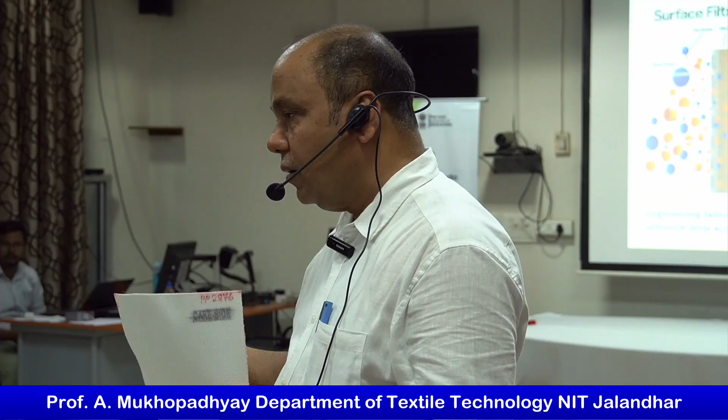Liquid can be reused in the process. As for the media, it is not for one time use - it can be used repeatedly because it is a continuous process. Again, if you are going for RO filtration, it is a continuous process, but from time to time you will have to go for backwash.

That is necessary for membrane filtration - in all membrane filtration, from time to time regeneration is required, because membrane is very costly, so you cannot throw it out. So time to time you will have to go for regeneration.

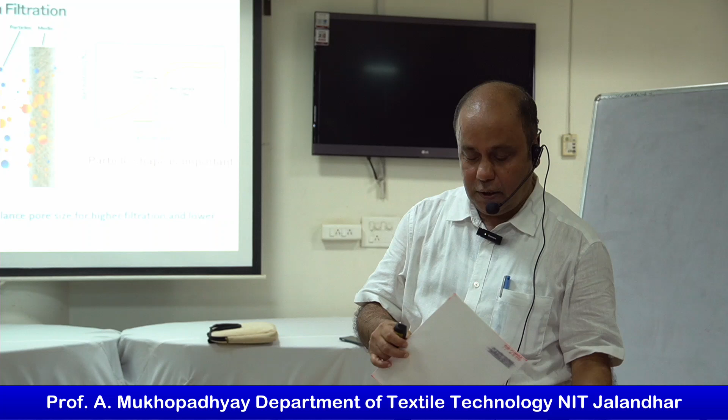If you talk about surface filtration versus depth filtration - whenever I talk about this kind of filter, at a certain depth the particle will be arrested, so this is known as depth filtration. Surface filtration means it should be on the surface. Why are you not going to the depth? Because depth filtration will lead to higher pressure differential.

Because this side is more smooth, it can dispose of the cake better - that is why it is engineered. This material is engineered in a particular way, as I have shown you - this side will be rough, but this side is very smooth.

This can be done by means of weaving - I will tell you in due course of time. This side has to be smooth so that you can dispose of the cake properly. Suppose if you are going for spun yarn - I don't know how many of you know spun yarn, hairy yarn - spun yarn will be on the back side.

Because of its hairiness, its filtration capability will be more. More you can have the filament on the front side. Because of the filament, it can dispose of the cake in a much better way.

If you see the structure of denim, one candidate is wearing denim, the back side is different, front side is different. How is that possible? It's possible by means of weave structure. We make the weave structure such that this side is smooth, so it can dispose of the cake properly, and the back side is rough. That gives more filtration capability.

Now one of the interesting challenges, there are many challenges. Disposing of the cake is one sort of challenge, but there are many others. Suppose if you make this structure very compact, what will happen?

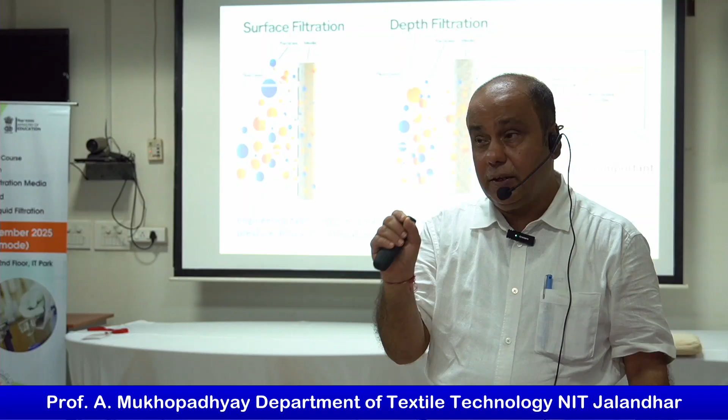It's not that at a particular particle size, if you get efficiency, it's all fine. Not like that, it all depends on the application. Suppose the application demands very fine particulate to be removed, we must see what the efficiency is at that level, and for that the sensor requirement will be different. Different applications need different kinds of setups, it's not possible to do everything in a single setup, because everything should be aligned, sensor should be aligned, everything should be aligned.

Now if you see here, I am showing you surface filter and depth filter. In depth filter, the retention could be 60 to 90% for a particular size. In surface filtration, you can have retention like this. So for a particular size, if the retention is 90% for these particular particles, I think there is some problem. Is it okay? We can get 99% efficiency for that particular size.

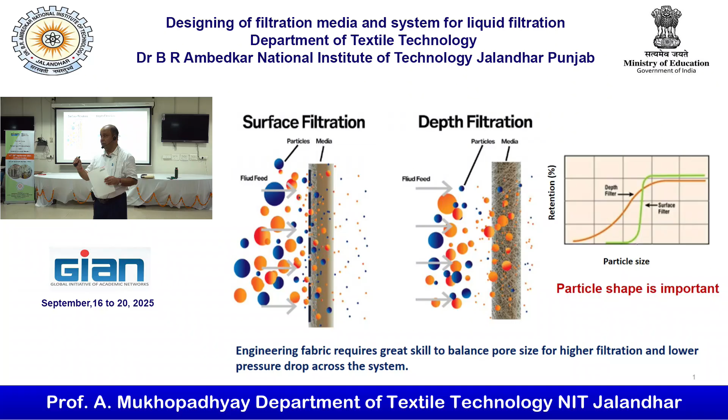That is possible because it is an absolute filter, the pore size is very uniform. Whereas when the pore size is not very uniform, you can have small pores as well as large pores, so you cannot maintain one particular efficiency level for a particular size, that is not possible. But if you are going for a woven fabric, you can maintain a particular high efficiency level, and that could be constant, you can maintain it at a constant level.

Now, if you see, the concept of complete blocking filtration and bridging filtration is important.

Because if you talk about air filtration and cake filtration, mostly you will find this thing is very prominent. I am not talking about ultrafiltration, RO and all this, because there the pore size in the membrane matters, because in the liquid you have few particles. The particle load will be much lower in reverse osmosis and ultrafiltration. As the particle load is very less, the blocking mechanism basically works.

But whenever the particle load is more, quick cake formation will happen and the cake will take part in the filtration process. After the cake is formed, the cake acts as the filter, not the fabric. The fabric's role becomes secondary. It basically initiates the cake formation. Once the cake formation is over, then the cake takes part in filtration. I hope the point is clear.

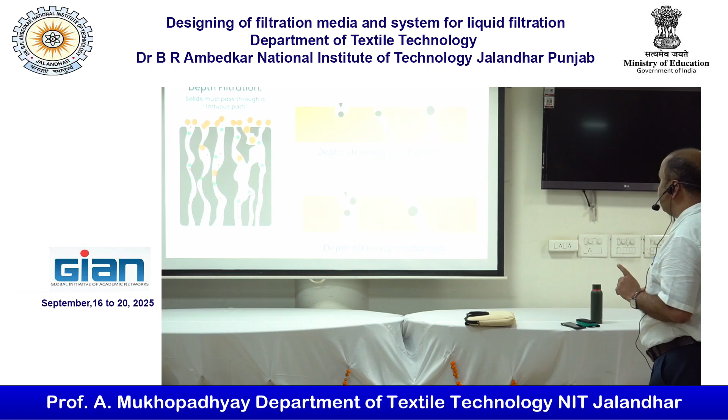Now if you see the depth straining and depth retaining mechanisms, at a certain depth it is retained, but at a certain depth it is straining, because we conceive the pores like this, but actually the pores in nonwovens are interconnected in nature. Researchers used to conceive the pores in a zigzag manner, but actually nonwoven pores are not zigzag; the point is that they are all interconnected. A particle may pass through the top surface, but it can get caught at a certain level.

So depth straining is very common, but depth retention in liquid filtration is uncommon. In air filtration, depth retention is common, for example if you are using a pre-filter. That is why, whether air or liquid, flow velocity is very important. If you have a dominant flow velocity, then retention at a certain depth may not be possible. That is why flow regulation is very important.

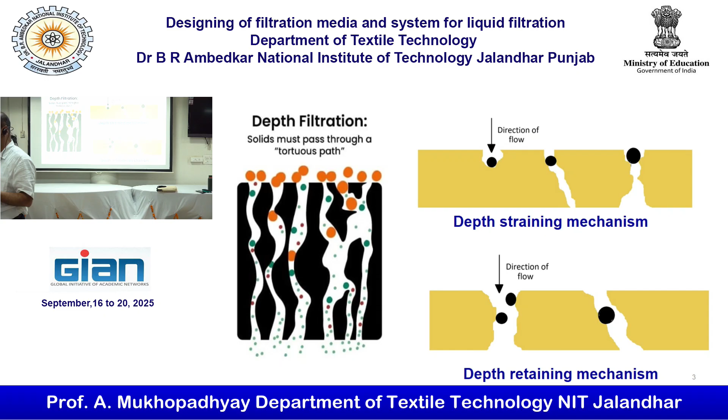Suppose you are designing a filter media or an HVAC filter, why do you go for pleating? What is the reason for pleating? So we can get a larger surface area accommodated in a smaller space. Even in automotive we go for pleating so that we can accommodate a larger surface area. But the basic purpose of pleating is the reduction of velocity. If you can reduce the velocity, that always helps in capturing the particles. That is the basic philosophy, and that is why people go for pleating.

Again, in the oil filter and everywhere, space is one aspect, but it is better to say that by giving more area, the volume flow divided by the area, that is the filtration velocity. Volume flow in meter cube per minute divided by area in meter square gives you the velocity. So velocity should be as small as possible, whichever the application.

If you have nearly zero velocity, that will be perfect. But the problem is that there will be a huge requirement of filter bags, or in this case a larger surface area is required. That's why it is a balance. You have to make a balance: what sizes can you accommodate?

Because if you can reduce the velocity to the zero level, obviously you can have more and more capture, but we cannot go for zero level, because the size of the filter will be huge and that will be difficult to manage.

Now this is the tortuosity factor. Again it is conceptual; whosoever measures the fabric properties can provide you the tortuosity factor, and this is how tortuosity is defined: length of the pore path divided by the thickness of the material. Greater the tortuosity, greater will be the capture of the particles.

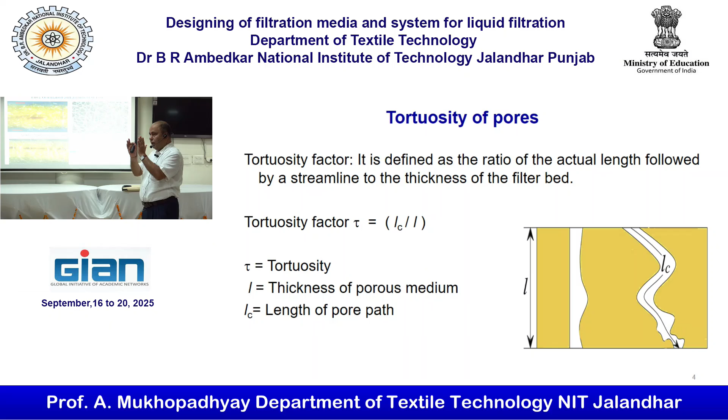Sometimes it is also said that if you are making needle-punched non-woven and going for angular needling, the path of the pores will not be straight. If the path of the pores is not straight, that will be better for filtration application. So different types of structure are there, and in non-woven, one of the problems is that if you have a straight path after the punching process, and I will discuss non-woven fabric manufacturing also, the particle can penetrate through.

Another important aspect is cake filtration. Okay, so the point here is that in majorly air filtration applications, non-woven is preferred, this material is preferred. Whereas in the case of liquid filtration applications, people prefer woven fabrics.

But again, there is a but. People are moving towards development of non-woven, because last class I showed you that very compact non-woven can be used, which can assist surface filtration. So that non-woven can be specially made. What is the advantage of non-woven over woven fabric? Anyone? Cost, obviously non-woven cost will be lower. But what is the basic advantage? Smaller particle capturing as compared to their pore size. The pore size distribution. Any other point?

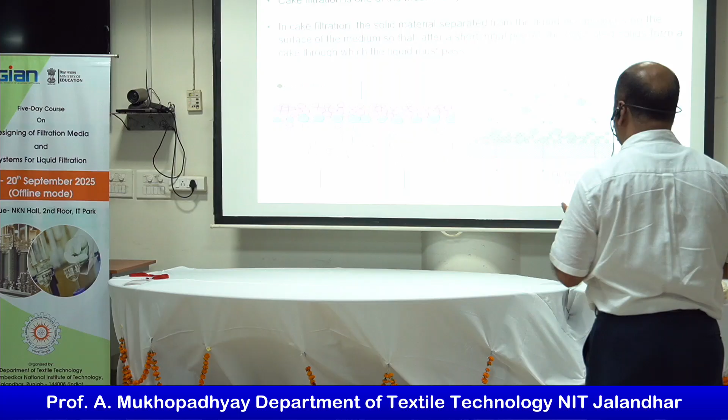Second is the pressure, and third is the life. These three are very important whenever you are selecting the filter. Now in cake filtration, as I told you, once the cake is formed, the role of the cake becomes very important, and the fabric's role becomes secondary.

But in most cases we forget; we assume particles are spherical bodies. That is our assumption, and that is again a problem. The basic problem in most research is that we take the data and never think about what kind of data we are getting. That is the problem.

We can have different kinds of dust particles. They can be flake-like, but the equivalent spherical size will be much lower. They could be needle-like, and the equivalent spherical size will be much lower. If you talk about needle-like particles, capturing will be more with needle-like particles. And whether hydrophobic or hydrophilic particles are present also influences the nature of cake formation.

So it is not just that you see the data from the instrument, that is okay, but you will have to see what kind of particulate matter it is. Is it differently shaped or nearly spherical? Particles are never spherical. So the question arises: why do we take them as spherical? Why not other structures or dimensions?

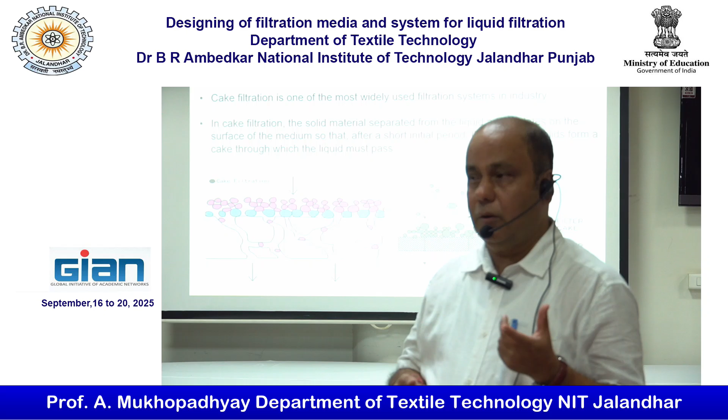Any answer? Why do we take particles as equivalent spherical bodies? What is the basic reason? Why a sphere, why not other shapes? Whichever direction it moves, it will have the same. Calculation-wise, it is easy to calculate.

Because the sphere is the only shape where you can indicate the dimension by diameter. If you take any other shape, you need multiple dimensions to indicate the size and shape of the material. So the sphere is unique in that sense: by indicating the diameter, we can indicate the size of the material. That is why we use a sphere as the equivalent body.

Now in cake filtration, I have written a little about it. Cake compressibility is very important. The ability of the cake to compress under pressure affects the filtration rate and cake properties, because the cake properties change under compression. So is it a compressible cake or not? That also matters a lot.

But we will not be able to control the cake formation, right? It all depends on the type of solid particle you want to arrest, because solid particles could be compressible or non-compressible. So depending on the type of solid particle, compressibility will be there. Filtration rate is again a very important concept.

With time the cake becomes thicker and thicker. Yes, that's why you need to dispose of it. Like yesterday I showed you, in a drum filter it is gathering, then the cake is disposed of on the other side, because suction is effective in a particular zone and not in another. That's why disposal is possible. But if we have a tubular kind of filter, then disposal?

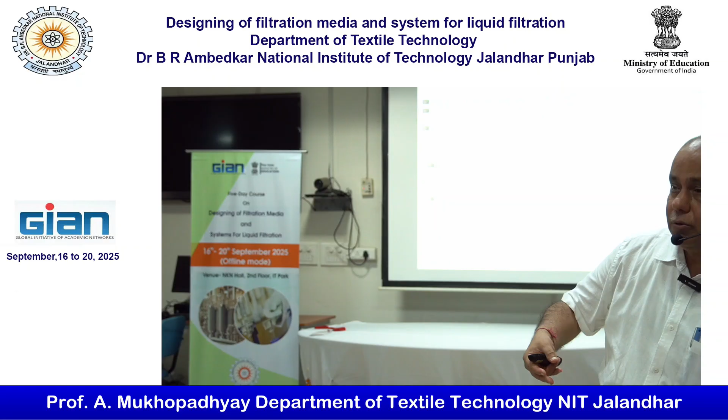is under depth filtration. Depth filtration is workable only when the dust concentration, particle concentration, is very less. We can have a reasonable time period after which you can throw it away. That is as simple as possible. But surface filtration will have to go for a cyclic process to regenerate it. So cake filtration is widely used in various industries: wastewater treatment, food processing, chemical processing, mining.

Now you can see this is the kind of pre-coat material. Very light cellulosic matter, as I just mentioned. Another material that can be used as a filter aid, especially in situations where silica cannot be tolerated. So here if you see, this is the layer, this is the dust cake. I will show you the application. So this is the pre-coat layer, inside it you have the main material.

So initially you must pass the liquid having the cellulosic matter, for example, to make a pre-coat on the fabric surface, so that you can arrest finer particulate matter. I will show you the advantage. Pre-coating protects it from blinding, so life will be more; it assists in the collection of particularly fine particles; and it enables more efficient cake release. So these three things are possible.

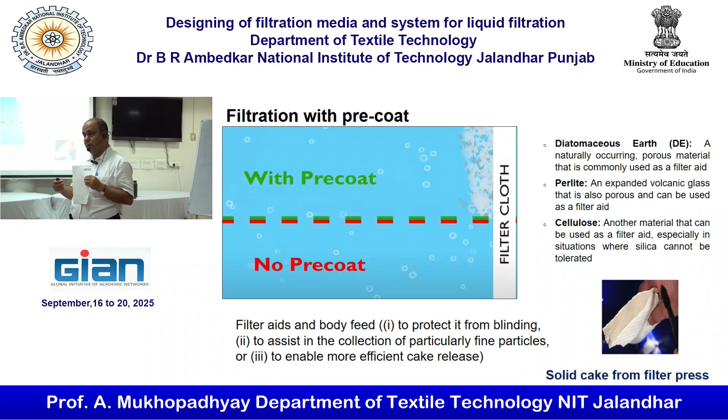Coating means that in the liquid bath you can have cellulosic matter, for example. Initially you expose the fabric to this liquid. Once it is exposed, the fabric layer will have some pre-coat. Then we can run the main material, I mean the liquid and solid, through the assembly. So it will act as a pre-coat. If you see here, outside it is a pre-coat, inside it is a cake. So it can give you a great advantage in certain applications.

Suppose silica cannot be tolerated, so obviously you need the efficiency at a much higher level, so you can go for pre-coat. This pre-coat has to be porous in nature. Yes, obviously it has to pass through the pre-coat, but the pre-coat can give you more filtration capability. And it can also be disposed of in a much better way, because a normal filter cake may not be disposed of as easily, but the pre-coat can be.

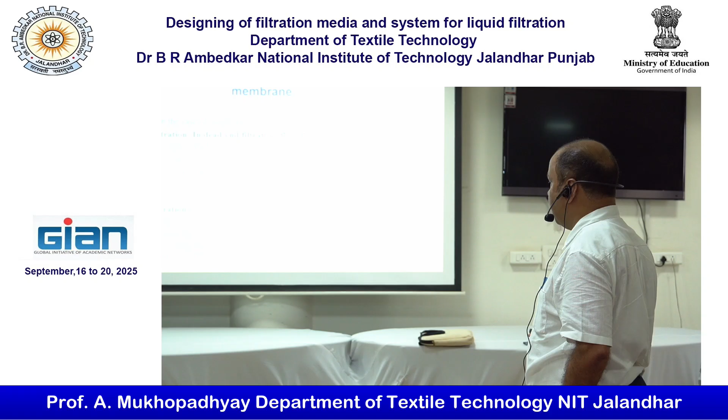Now another classification is dead end filtration and cross flow filtration. In dead end filtration, as I told you, the flow will be perpendicular to the plane of the fabric. In cross flow, like ultrafiltration and RO, you will find it flows in the plane of the fabric. Ceramic, metal, polymeric, all types of membrane are possible. Manufacturing of membranes is also a great task. How to improve the membrane?

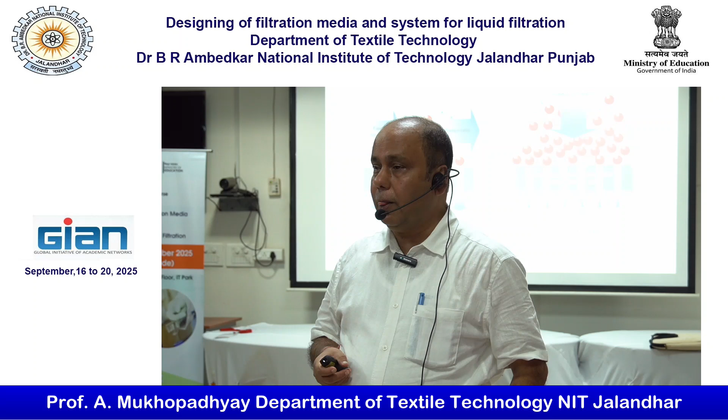Suppose you make the membrane thick, then the pressure differential will be more. How to make a membrane fine and with longer life? That is a challenge for various applications, not only this one. For example, at high altitude, if you want to use the membrane on the inner side of the fabric as a breathable layer, it is important to make the membrane very fine and at the same time strong. Why should it be very fine? So that the pressure differential is less. That is one of the tasks for the membrane manufacturer.

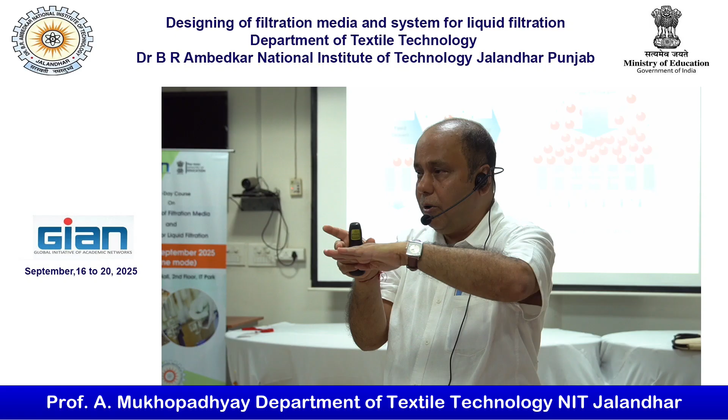I have seen at an international conference, people kept a membrane with a water body above it, and from the bottom they flowed air. So in the liquid you can see air bubbles moving up. The membrane stops the water from falling, the bubbles move up but water does not move down, because the pore size of the membrane could be 0.0001. It could be so small. The pores should be so small that they allow vapor but not water.

Okay, so membrane manufacturer, again that depends on the place; from place to place the membrane will be different. Now if you see here, the flow direction will be parallel, so here proper cake formation will never take place because it will be shearing out all the time. But then how it is getting managed, that also I will tell you.

And dead end filtration is most common. This is the dead end filtration, where it is perpendicular to the plane, and here it is parallel to the plane. Now you can see the dead end filtration, blocking filtration. This is for testing, water testing and biotherapy manufacturing. So basically the contaminant level, as I said, is very low. So we are going for blocking filtration in the case of dead end filtration. Contaminant levels are very low.

Now this is interesting to see. Okay, now the working principle of the tangential flow filtration. If you see, this is the cylindrical body we have talked about, and these are the particles which are moving through the cylindrical body inside. There could be also outside to inside filtration. Here I am showing you the inside to outside filtration. So these particles are moving through the cylindrical body.

retentate flow. Retentate flow means which is having some residual, which is having the solid particles. This again will be circulated in the process. So it is not a single setup; there could be multiple setups. Once the retentate is passing through, it will move into another unit, then gradually the water will get filtered out, and you are getting the solid content in the retentate.

So if you see, here is a particle, restriction is there, restriction must be imposed. Permeate flow, this is the permeate. So suppose here it is passing through the membrane from the top and from the bottom, although it is cylindrical, so from all over you will get the permeate flow. And this is the retentate flow. Retentate flow means which is having the particles in it. Obviously the quantity of water will get reduced. Getting my point?

RO, yes, RO, ultrafiltration, in all cases. For RO, the setup is different. I will show you the setup for RO. So in this case, when it goes to the second filter after this, the retentate flow, there the concentration level of the particles will be higher. So there the porous membrane parameters are different, or is it similar? It is similar. If it is ultrafiltration, similar membranes are being used in all modules. But gradually it will be denser and denser, and challenges will be more.

Now if you see, there are two philosophies. One is inside feed. Here if you see, this is the hollow fiber. In the hollow fiber you are having the semi-permeable membrane. So basically it is flowing inside, and the picture I have shown you works on the same philosophy. And in the other case, the feed will be from the outer side.

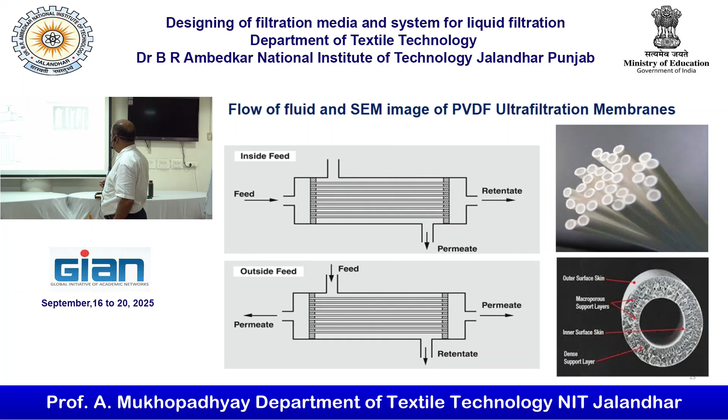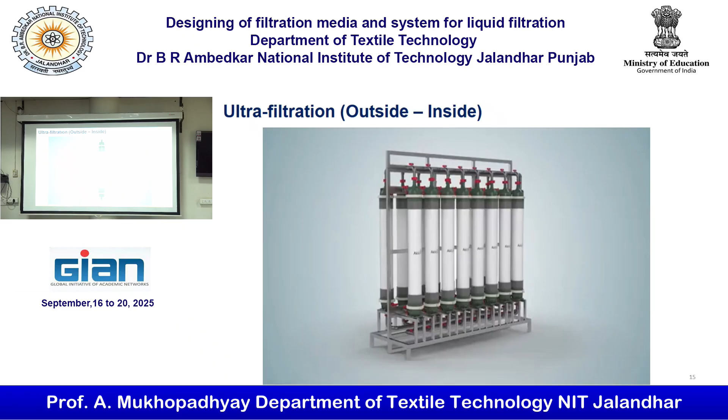Components include lower and upper cap, clamp, housing, raw water distribution channel and separator, pipe, and hollow fiber. The raw water distribution channel and separators are situated in the middle of the filter. This specially designed inner distribution mechanism ensures that water is equally distributed in the module.

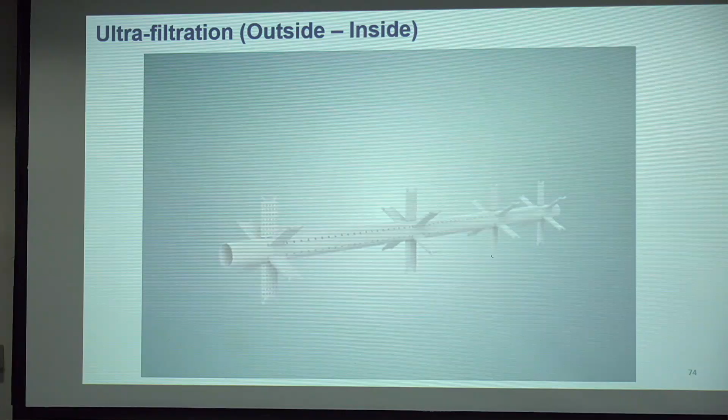The modified PVDF ensures a high chemical and mechanical resistance to the hollow fiber. The hollow fiber has smaller pores on its outer surface, creating the active filtration surface. This design gives the membrane a high capacity of contaminant retention. The hollow fiber is both highly permeable and easy to clean. Modified PVDF has a higher mechanical and chemical resistance compared to other materials.

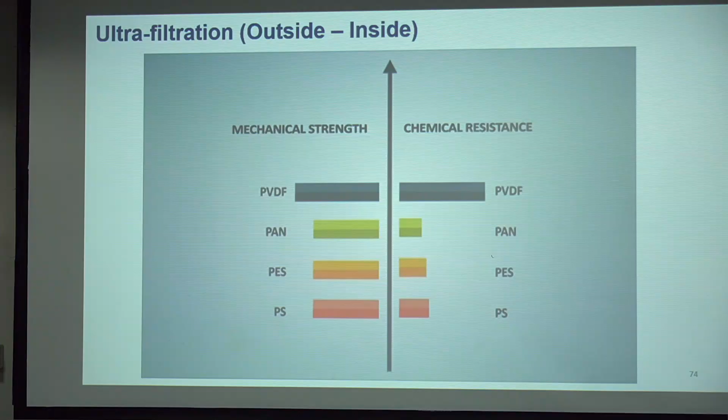The nanoscale pores located on the outer surface of the hollow fibers allow the water to pass through the thickness and retain viruses, bacteria, and solids larger than 30 nanometers. These substances cannot enter the fiber, they stay outside. The pore diameter of our hollow fiber is smaller than 0.03 microns.

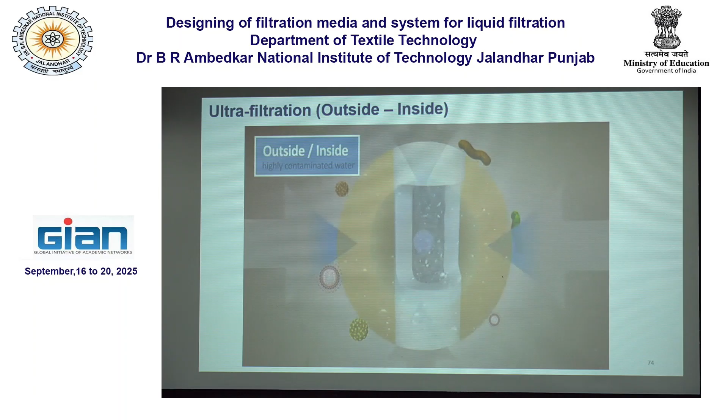The filtration process takes place from the outside towards the inside of the hollow fiber, so the membrane can be used for highly contaminated water, has a larger surface area, and can be cleaned more easily.

During the filtration stage, raw water enters into the module. Raw water stays out of the fibers. Filtered water flows along the lumen of the hollow fiber and goes to the module outlet. The polyurethane-based potting holds the fibers and provides the tightness to the module. The clean and raw water never mix through the module.

When the filter is blocked, contaminants accumulating on the outer surface of the fiber are removed from the filter. This is the retentate. During backwashing, the filtered clean water enters through the clean water inlet. As clean water comes out of the fibers, contaminants which have accumulated on the fiber surface are pushed and removed. Concentrated sludge is discharged through the outlet.

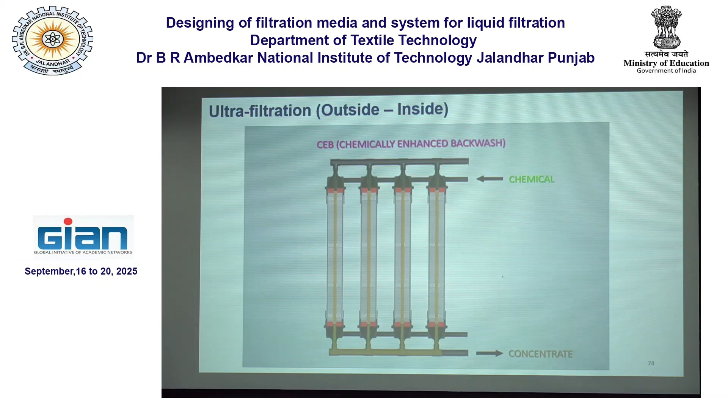Backwashing is performed more quickly and effectively when combined with air scouring. When the removal of contaminants is not sufficient with backwashing and air scouring, chemically enhanced backwash and clean-in-place are applied. Our PVDF hollow fibers are extremely resistant to chemicals, so if it is not possible by water, we can use chemical or biological filtration. Backwash is also possible using enzymes. So there are several ways to clean the filter media.

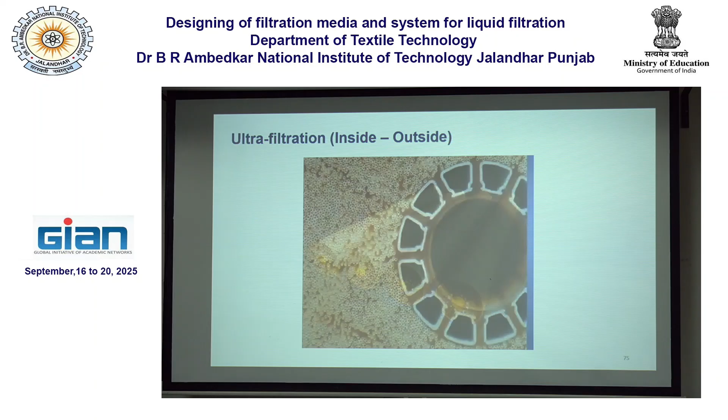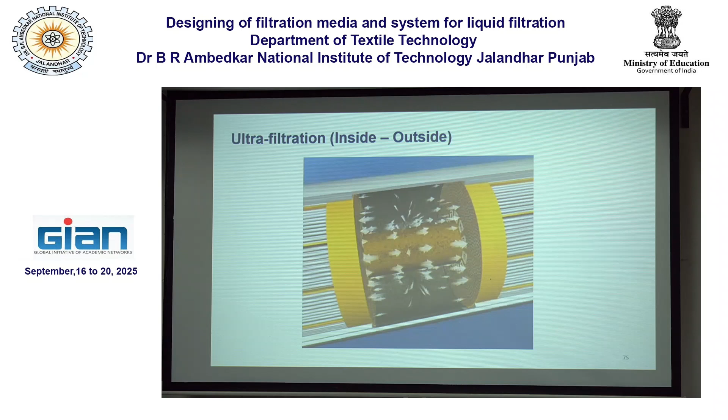This is another example of inside-to-outside filtration. So it is passing through the center of the hollow fiber, and centrally you have the tube through which you are getting the permeate. Permeate means the clean water.

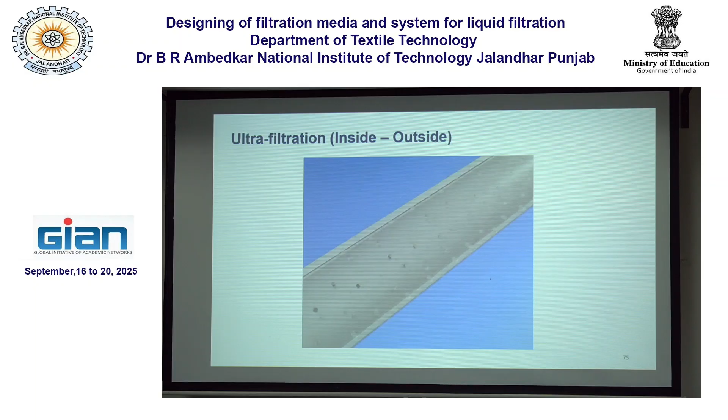You are getting the permeate. This is the hollow fiber through which the contaminated water is flowing, and then we can go. This is another backwashing technique.

So for backwashing, the flow must be reversed.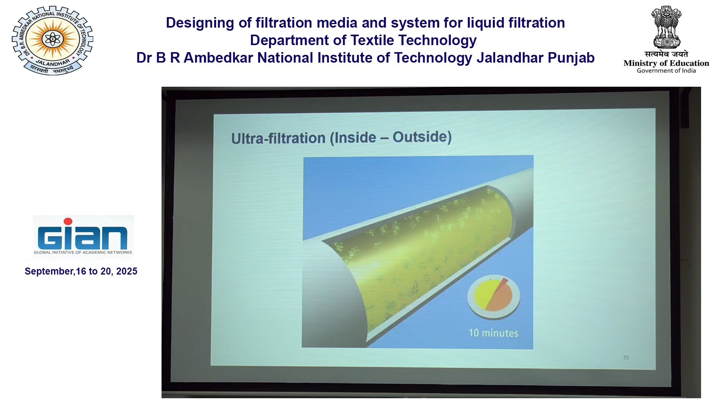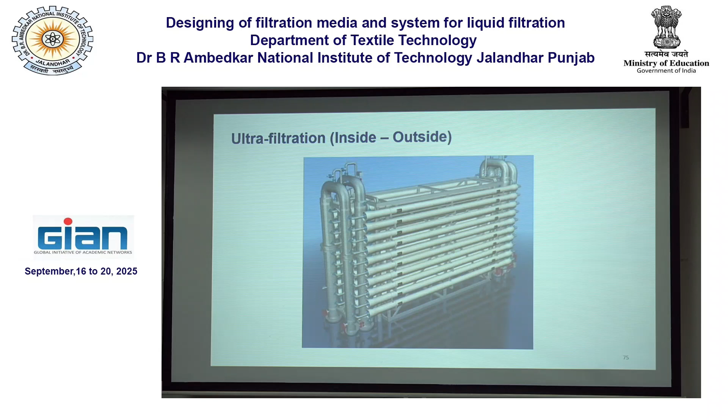Using chemicals. Yes, you can use water. If it is not possible through water, then chemical, but depending on the chemical, it has to be selected. Again, after applying chemical, you will have to use water also at the final stage.

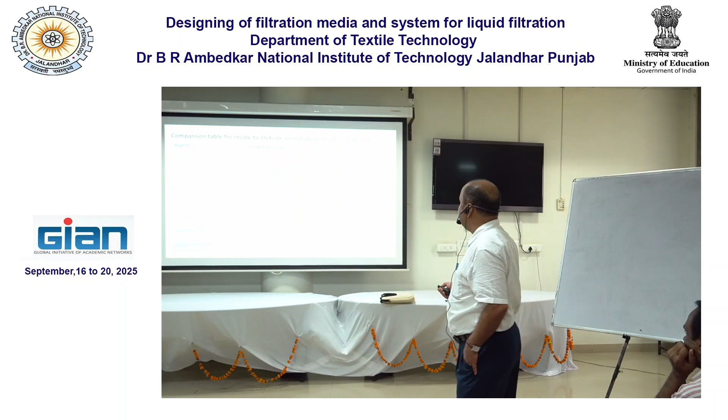Now here if you see, inside to outside is best for low turbidity. Outside to inside is best for high turbidity. I am not showing all of these because these slides will be with you, so you will get some idea. Risk of fiber breakage will be higher or lower in this case—that is the good point. So in certain cases the inside-to-outside is better, and in certain cases for high turbidity, the outside-to-inside filtration will be better.

So if you see normal cases, the mechanism based on flow direction means the thickness of the deposit increases while specific output to the filtrate will decrease with time, because gradually the cake is building up, so filtrate will be less with time. But in the case of cross flow filtration, output to filtrate will remain the same after a certain point of time, and thickness of deposit will remain the same too, because the cake will never build up like that. So after a certain period, thickness and specific output or filtrate will remain the same.

Now if you see depth and membrane filtration, complete blocking is possible, because blocking is the main concern in membranes. Standard blocking is possible, cake filtration is there, intermediate blocking is there. So blocking obviously reduces the life of the media and can affect the function of the media.

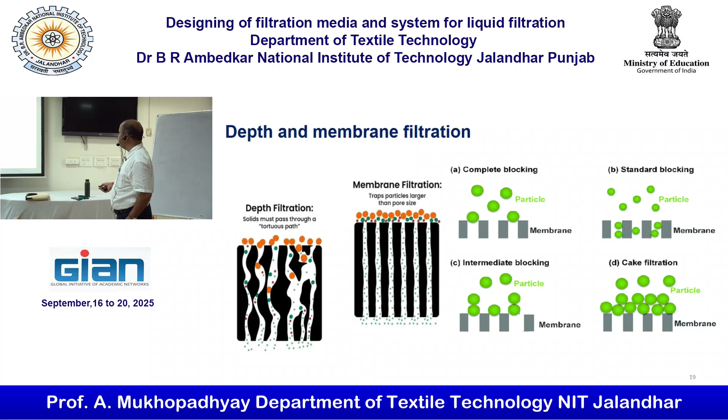As I said, biological cleaning is possible as a cleaning strategy, along with backwashing. Physical cleaning is possible, and people mostly go for physical cleaning. If it is not possible by physical cleaning, then they go for chemical cleaning. It is not that you always go for chemical cleaning - biological cleaning is also coming up, and you can use some enzymes for cleaning the membrane.

So different membranes have different pore sizes. If you see, microfiltration is 10 to 0.1 micron, ultrafiltration is 0.1 to 0.01 micron, nanofiltration is 0.01 to 0.001, and RO is further less.

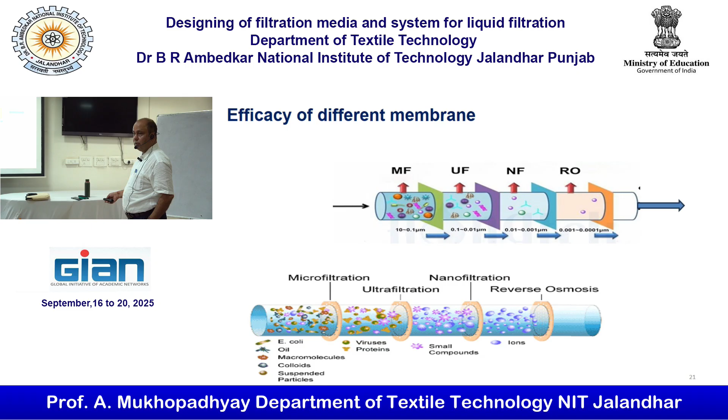So at different stages we remove different kinds of material. For example, ions can be removed in reverse osmosis. Small compounds can be removed in nanofiltration. Ultrafiltration can remove viruses and proteins. Microfiltration can remove E. coli, oil, macromolecules, colloids, and suspended particles. So different filters have different capabilities.

Now going to reverse osmosis, let us understand the mechanism of reverse osmosis also. This is the cutoff of different liquid filtration techniques. So depending on the cutoff, we will have to select which kind of membrane filter is applicable.

Because this is the membrane filter, and the RO filter obviously needs a very high level of force. If you see the membrane filter, ultrafiltration is 0.5 to 10 bar, here 7 to 75 - energy requirement will be much higher. So unless and until you require RO, we should not go for RO because the energy consumption will be much higher.

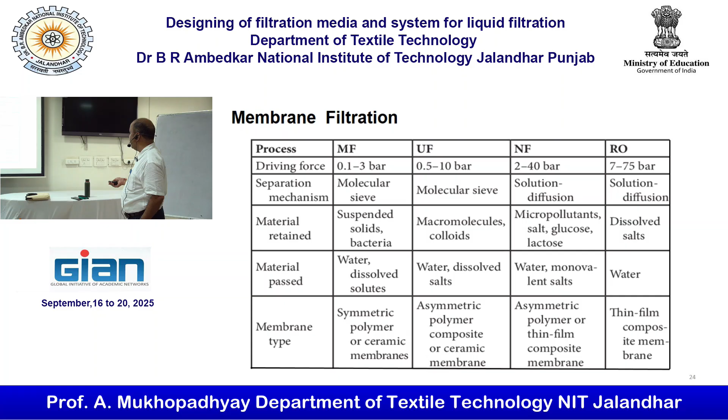That I have already discussed. You can see this slide showing the advantages of microfiltration, ultrafiltration, nanofiltration, and reverse osmosis. Basically you are removing everything - even monovalent ions and multivalent ions are also being removed in reverse osmosis. That's why it is suggested that reverse osmosis water is not also good for health, because we are removing everything.

So these are the different types of membranes. You can have hydrophobic membranes, electrostatic interaction, adsorption. Different membrane manufacturers are also coming up with different types of membranes - biologically inspired membranes are being developed. Sometimes it could be electrostatic interaction, sometimes it can give you adsorption or hydrophobicity. Earlier, membranes were only about size exclusion, but nowadays new membranes are also coming up through research that can give you some additional performance.

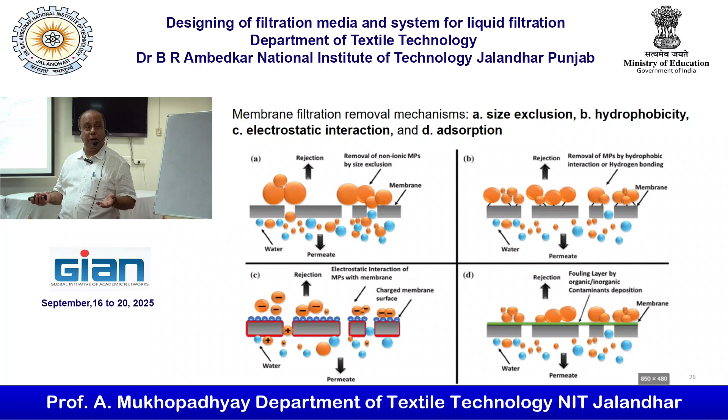This applies to all salts and inorganic molecules, as well as organic molecules. It is therefore a highly effective process for removing a variety of contaminants. Compared to traditional filtration technologies that rely on a screen or filter to remove particles, reverse osmosis is a pressure-driven separation process that employs a semi-permeable membrane and the principles of cross-flow filtration.

FilmTec RO membranes are composed of a thin film composite membrane consisting of 3 layers: a polyester support layer. You see, it is not a singular component - there's a polysulfone substrate and an ultra thin membrane layer, coated by a proprietary fouling resistance layer.

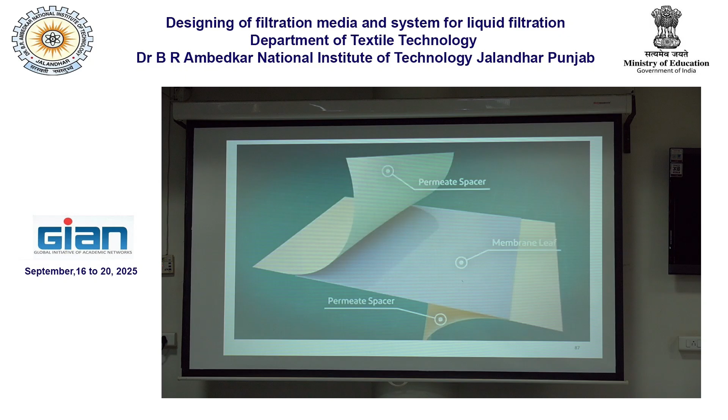This is the feed pressure through which the water can flow. This thin film composite RO membrane is packed in a spiral wound configuration that follows the principles of cross-flow filtration, where the flow is applied tangentially across the membrane surface. As the feed flows across the membrane surface, filtrate passes through - so it is basically moving in a spiral direction and moving to the center.

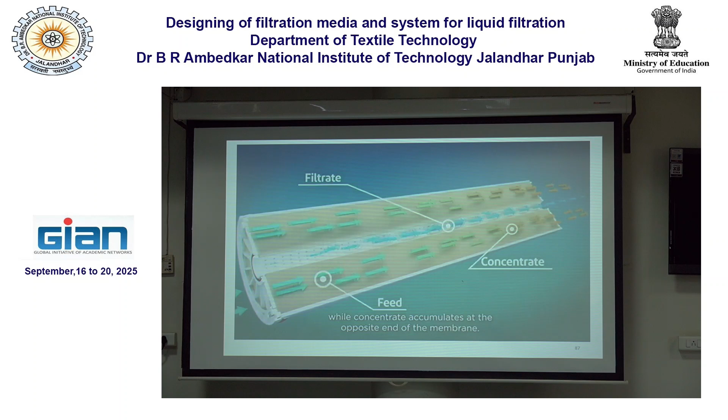FilmTec membranes offer a special interlocking capability called iLEC, which is an interlocking end cap technology offered to selected FilmTec products. You see, one module is attached to another module.

Okay, so up till this, the thing is okay.

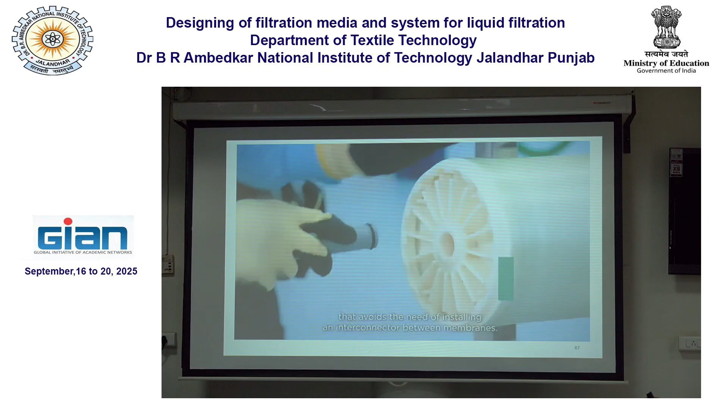Got the idea? So in this case, basically the contaminated water moves spirally, and gradually it moves inward because it is made in such a fashion. So gradually the contaminated water will move inside, and inside you are having the perforated tube through which you will get the permeate. And contaminated water will pass through the spacer, because in between that membrane you are having the spacer.

Spacer - if you see, you can get several videos on YouTube on how the spacer operates. But again you give certain restriction so that the water has to pass through the membrane, because that is the basic philosophy. You will have to put certain restriction, certain resistance, so that water has to pass through the membrane. That is the basic idea. That's why the pressure differential is so high in RO.

Now coming to the centrifuge system, there are two kinds of centrifuge system. One is the perforated basket centrifuge, and this is commonly used. I will directly go to the pusher centrifuge because of time, I'll try to cover it in 5 minutes.

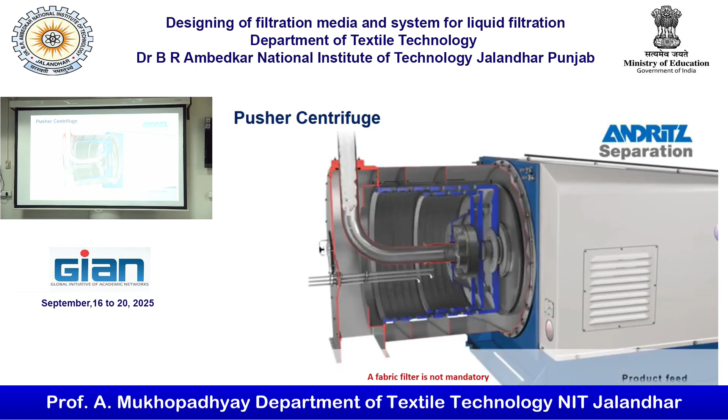Pusher centrifuge, I will show the video, because inside the pusher centrifuge there will be a metallic body, perforated metallic body, over which you can have the textile fabric. This can be used in the case of pharmaceuticals and expensive minerals recovery. So there we can use the pusher centrifuge, because it will be relatively much more expensive. It is short, but maintenance cost will also be important.

You can see how it operates. Cake is formed, but cake will be pushed time to time. Cake is formed and there is a pusher which is pushing the cake in a particular manner. You see, once it is coming to the edge, it is taken out. Cake will be taken out. So it will be pushed. Once the cake is formed, it is pushed. Again formed, it is pushed. So it is gradually pushing the cake, so that at the end, whenever it is coming to the edge, it will be taken out. You can see at the edge it is taken out.

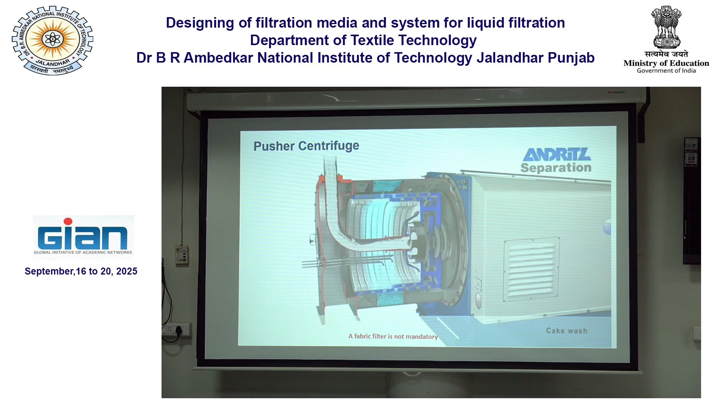So abrasion is very important, because sometimes we neglect it, we always think that efficiency is important. Abrasion also damages the fabric. So here you can have abrasion of the material with the particulate matter or with the solid matter. So abrasion is very important.

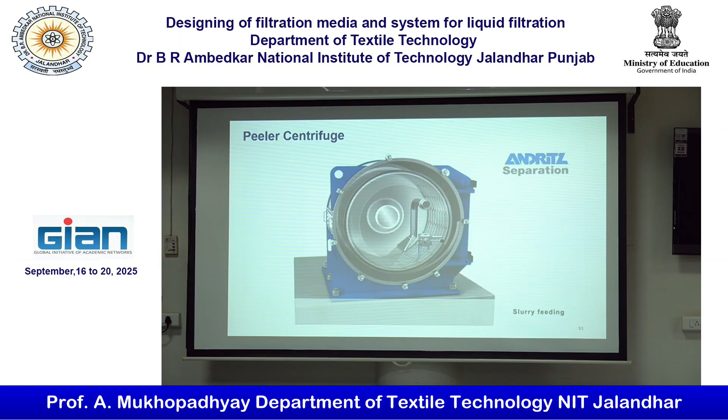Another is the peeler centrifuge. I will show you the direct video, then things will be clear. So it is basically slurry feeding. Initially it will be slurry feeding.

So slurry is fed, and by means of centrifugal force you are extracting the water from the slurry. Here cake is washed - filter cake washing. So, dry spinning.

Cake peeling and discharge. Although I am showing one system after another, the whole system is embedded. So here you are basically peeling out the cake. Cake peeling is there, and through the discharge mechanism you are removing the cake. So cake is peeled out, and through the discharge mechanism it is taken out.

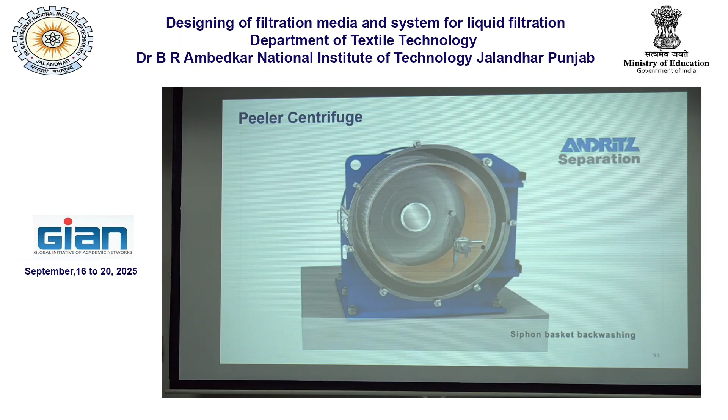So which one is a batch process, which one is a continuous process, any idea? Out of these two, are both continuous? Which one is continuous and which one is batch, or are both continuous? Both are continuous, all agree? No - is it stopping the process, or not? Whether it is batch or continuous, or only continuous, or only batch. Second one is batch.

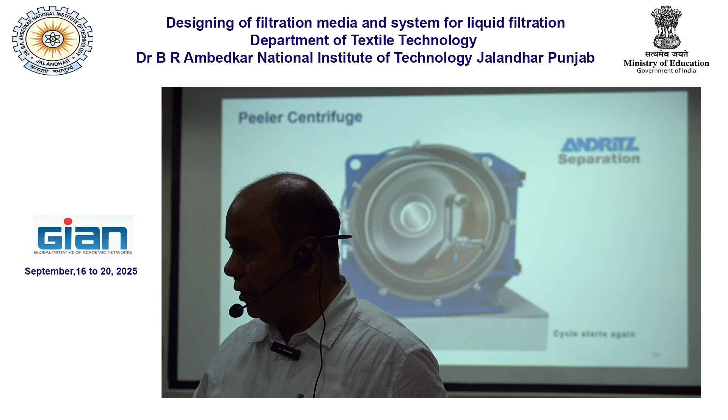First one is continuous, because for the washing and everything, you need another operation. During that operation, the filtration is not there. During washing and everything, filtration is not there. The first one is continuous, because continuously you are pushing the material, so it is not a batch process. First one is continuous. Second one is a batch process. This one is a batch process. It is not that you will have to stop for batch process, but it is a batch process.

But then, what is the advantage of this? The abrasion will be much lower, so it will act less on the filter material, because filter material is also very costly. The life of the filter material will be better, since abrasion will be less in this case compared to the previous case. So there must be some positive point - remember that the batch process must have some positive point, otherwise why would people go for a batch process?

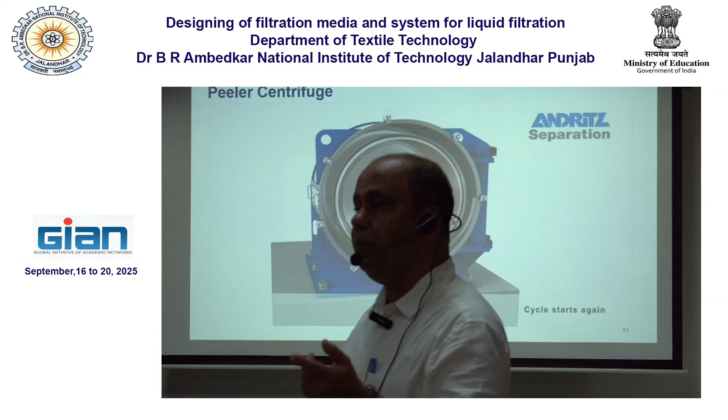Always should go for continuous process. What's the problem? Okay, batch process must have some advantage. So if you see, this is another setup for your blood filtration. Serum from blood is taken out. Okay, detection of biomarker. This is for cancer patient. Okay, we want to test the serum.

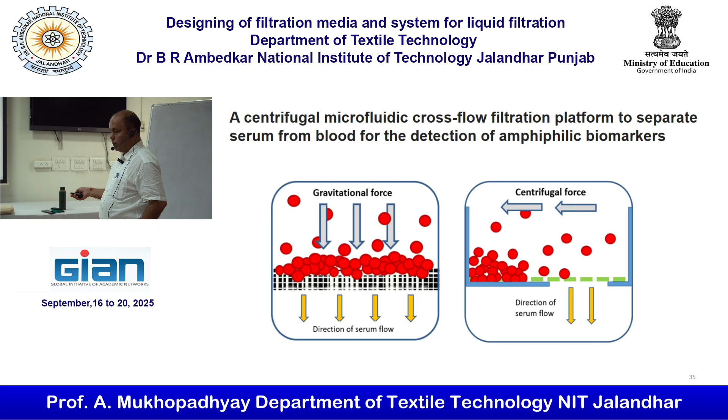There also tangential cross flow filtration is important, and this is a separate setup that has been shown, how it works. Because see here, its uniqueness is that through centrifugal force, here you are having the filter media, you are pushing the solid particle to one side, larger particulate matter to one side. So filter media can take out the serum from the blood. Okay, so direction of serum flow. So pores in woven and non-woven fabric.

I think how much time I have left? I think time is over, or okay.

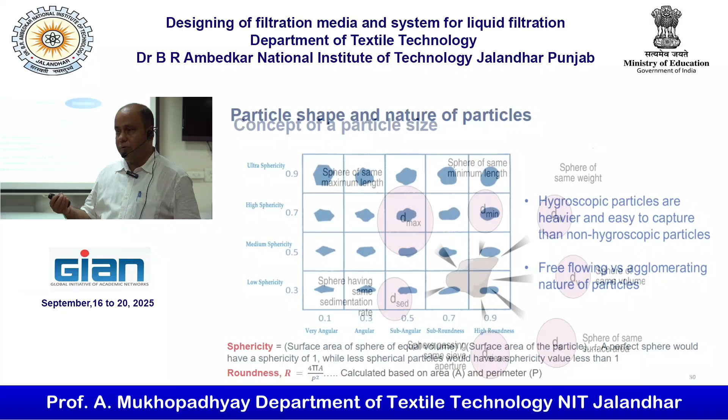So this thing is important. Tomorrow I am having two consecutive lectures, first and second. So in two consecutive lectures I will discuss this, because this concept is important, about the pore size, the voids and all these things. Because I should not make it in a hurry, because the understanding of these pores and the particle size is very important. So this part I will discuss in tomorrow's class, along with the cake, because there are also several things about the media.

So till now I have discussed all the mechanisms where you can make use of media filter. Then about the media filter I will discuss in tomorrow's class.

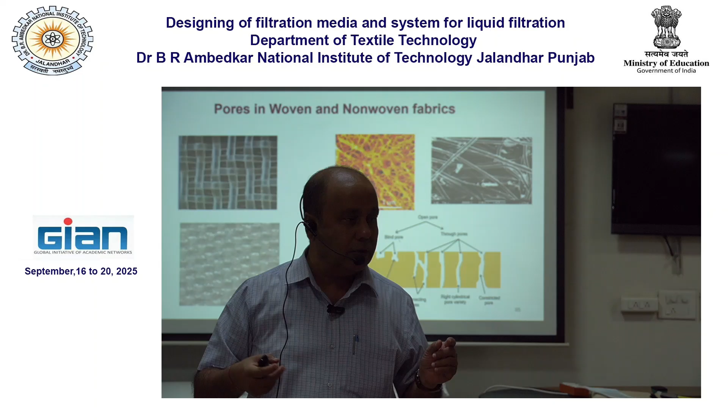If you see the non-woven pores, they are not very regular, whereas the woven pores could be regular. Now, if you compare the pores of woven fabric and non-woven fabric, the non-woven fabric pore size distribution will be broader, but woven fabric pores will be narrower. If you see, it is sharp. So woven fabric pores will be narrower, within a range, and the non-woven fabric pores will be very wide, and that also has some practical implication.

For example, if you want to remove all 5 micron particles, in the case of woven fabric you can exactly remove 5 micron and above. But in non-woven, because the pores will be large as well as small, you cannot ensure that. That's why nominal rating is possible in the case of non-woven, whereas absolute rating is possible in the case of woven, because with woven you can guarantee that 5 micron and above you can remove, because you can make the pores in that particular fashion.

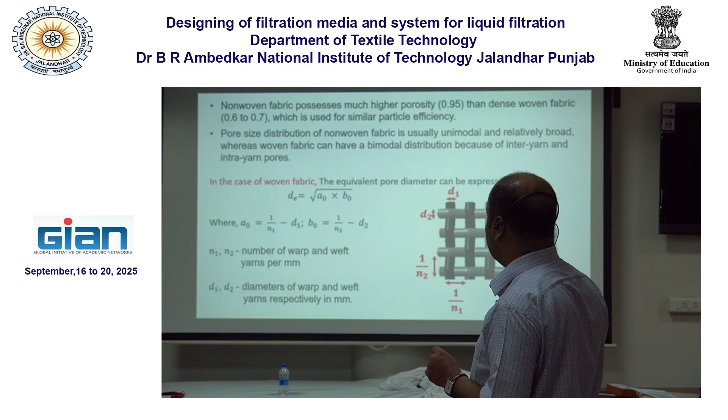Now you can see this is a woven structure, and if you see the dimension of this square, if this is the diameter, 1 by n1 will be the distance between one thread and another thread. What is n1? Textile people are more acquainted with this. Number of warp and weft yarns per millimeter. Basically, you are getting this size.

Now, this dimension is A0 and the other dimension will be B0. If you take the root of their product, you will get the equivalent pore diameter. This is one of the ways to estimate the pore diameter. Whoever is in textiles understands it, because basically it is square geometry. You can also look through a microscope to get an idea about the pore size.

Now, you can also use the harmonic mean instead of the geometric mean, and you can also take the area. Suppose you are using an image analyzer, you can take the area into account, and from the area you can find the equivalent size of the pores. So there are different ways to estimate the equivalent size. Sometimes harmonic mean, sometimes geometric mean, and area can be estimated through image analysis, and from that also you can find the equivalent D. But one point we must remember: only when the structure is relatively open can you use this.

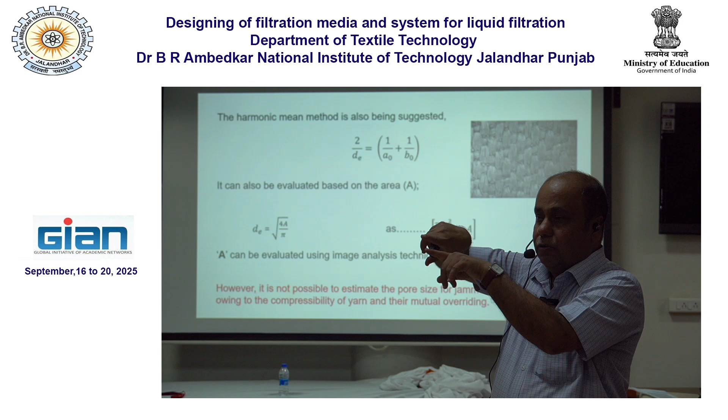Otherwise, for closely constructed fabric, there will be overriding of the threads. Whenever I talk about the denim cloth, for example, it is not that all the threads are lying in a single plane. The overriding of the threads is taking place. So if there is overriding of the threads, you cannot make use of this equation. So that is one of the cautions. So for jammed fabric construction, and because of the compressibility also, you cannot make use of that.

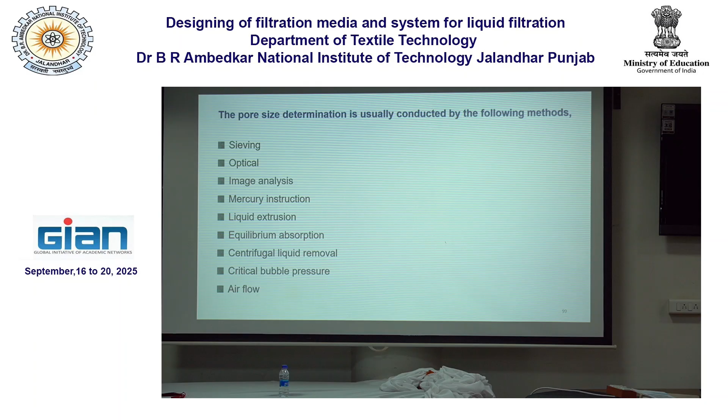Now, pore size determination is usually conducted by the following methods. The sieving method is used for geotextiles. Why do we go for the sieving technique for geotextiles? Because the soil particle size will be much larger. That is under consideration. So therefore, sieving is used in civil engineering applications. Optical technique can be used. Image analysis technique can be used. Mercury intrusion technique is extensively used in civil engineering.

Although people are using the mercury intrusion technique in textiles, it is not at all valid for a number of reasons. Because you cut the sample in a small size and the mercury can intrude from all sides. Because the flow direction is perpendicular to the plane of the fabric, you must have the concept of pore in the perpendicular direction of the fabric, not from all directions. But the mercury intrusion method provides you the pore dimension when the mercury intrudes from all directions. That is problem number one.

Another problem is that when the mercury intrudes inside the pore, the material gets compressed, so the whole pore dimension will change. But it is extremely successful in the case of civil engineering applications, because civil engineering is very concrete. In a concrete structure, this is very useful, because if the pore size is greater, obviously concrete strength will be less. So this is very much in use in civil engineering applications, but it is not so useful in the case of textiles. So in textiles, the most relevant testing is the critical bubble pressure.

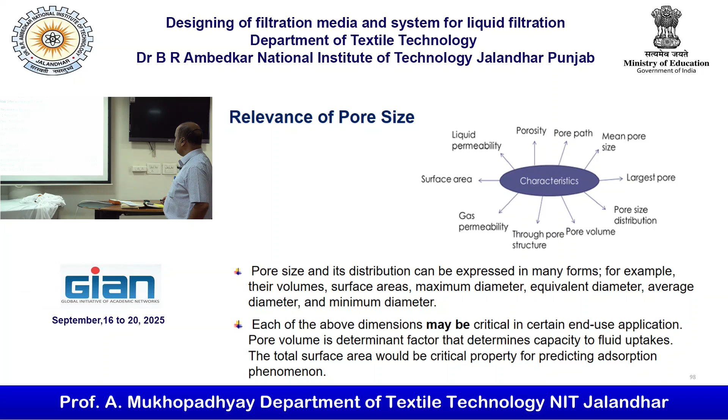So that is the idea, because in the actual case pores are a multidimensional and interconnected fibrous network. Estimation of pore size in the case of non-wovens is quite complex. Scientists have evaluated it, giving the pore size, maximum pore, minimum pore or whatever, but as I told you, we have to use our own judgment whether the instrument is giving us the right kind of data which can be used for engineering of the material. Why do we need the pore size? So that we can engineer the material in accordance with particle size. That is the basic idea.

Yes, what type of application we are using it for. So that's why I am saying that blindly we should not accept anything, because many machine manufacturers or instrument manufacturers will always be pushing for the pore size analyzer.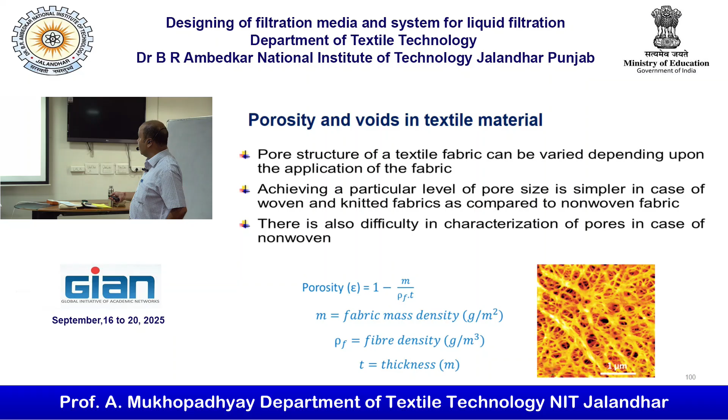Here if you see the voids per gram, porosity is important while you are looking at the voids, but it is also impacted by the rho F. And if you see the voids per centimeter square of fabric, that I have derived on my own, because that is not given in the literature. We can have the voids, which is related to the mass density of the fabric also. So it is related to porosity, to the mass density and also to the fiber density. So per centimeter square you can estimate the void.

Now what is the practical significance of the voids? It is the importance of depth loaded filter: how much dust particle can be arrested by the media. More the voids, greater will be the amount of dust particle which can be arrested by the media. It is not the porosity. Porosity cannot define it clearly, because porosity is an intrinsic property, whereas the voids is the absolute property, the absolute behavior of the fabrics.

The problem with porosity is still there. If you see the porosity, there is a problem. Why I say? Because this you will not get from any textbook or any journals; there are some inherent problems with this particular parameter. What is the problem? For example, if you take porosity 1 minus m over rho into T. Now tell me, if you are making the yarn very compact, then what will be the fabric thickness?

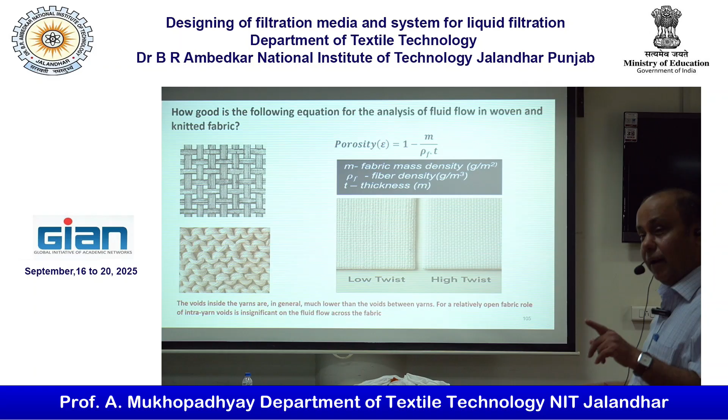First, if you are reducing the T by making the yarn finer, high twist, if you make it thin, then obviously this parameter will be higher and the porosity will be lower. On the other hand, just imagine if you use the high twisted yarn, the fabric will be more porous. It will allow more fluid flow. That is the problem. In a number of research papers I have seen this sort of problem. People try to address their issues by means of porosity, but it is not fitting well.

If you want to address the depth filtration, it should be by means of voids, not by means of porosity, because porosity is not the right terminology. That's why I have mentioned it's not an effective indicator for understanding fluid flow in woven or knitted fabrics. So it is not a proper equation.

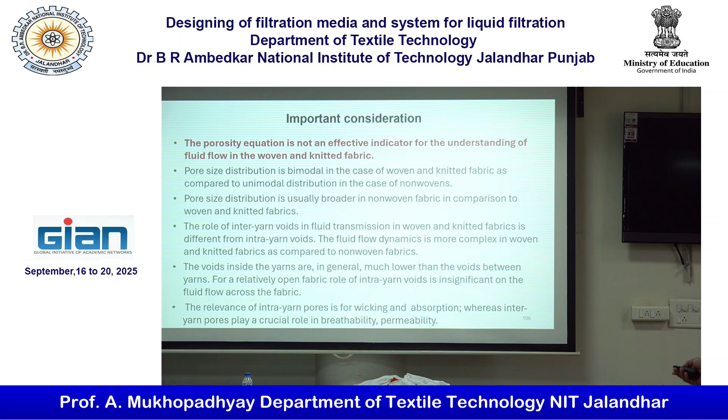Okay, so if you see, this is the pore dimension and the pore throat analysis is possible. Now coming to the particle size. Different ways we conceive the particle size. As in the last class I mentioned, equivalent spherical body is the concept. Why equivalent spherical? Because sphere is the only object where you can define its dimension by means of diameter. That's why we go for the equivalent sphere concept.

Now here, maximum length, this is possible, minimum length, that is possible, sphere of same weight, it is possible, sphere of same volume. Mostly in the laser based technique, we will get this data, sphere of same volume, sphere of same area. This is possible whenever going for laser based technique for assessment of the particle size.

Now the question occurs: why are we not taking the actual value? The actual value will be very tedious. If you look under the microscope, the particles in a mass of particles are not all the same, they are all different. That is number one. Another major problem why you are not going for the microscopic technique: one is that it is very tedious. Another major problem, what is that major problem?

What is the major problem that we are resorting to the laser based technique, not the microscopic technique? One is that it is tedious, obviously, but one or two times people can go for a tedious job and have some assessment about the particle size. But what is the major problem? No. Projection, okay, time to time you will get a different projection, but the point I am trying to ask is why the microscopic technique is a problem, why you are going for laser based technique, that is my question.

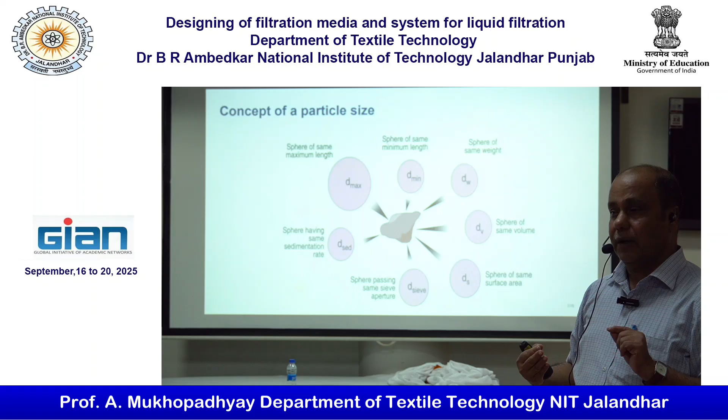That's why I told in my last class, if you have a needle-like particle, the spherical size will be small, but for a needle-like particle the filtration capability will be more. If the particle shape is different, its filtration capability will be different. Filterability will be more in the case of a needle-like particle as compared to the equivalent spherical size. So there is a problem in defining things, but we must know the background. We must have the fundamentals clear. So what is the inherent lacuna in the system?

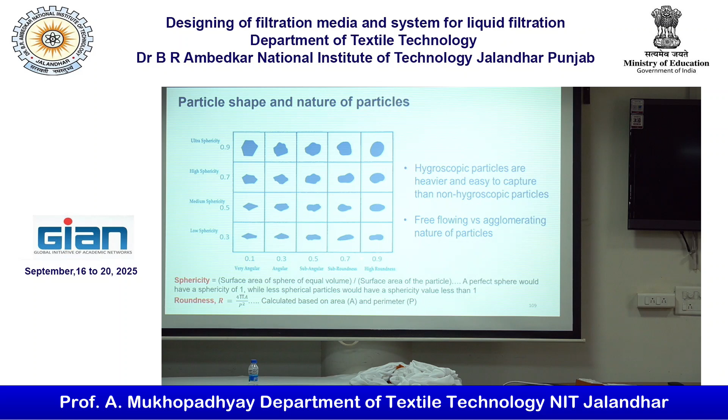Now that is why I define particle shape and nature of particles. One is whether it is close to spherical shape, ultra sphericity means 0.9, or whether it is rounded or not. For roundedness there is a different equation, based on the two-dimensional image, and sphericity is defined on the three-dimensional image.

In the case of laser based technique, obviously we assess this shape, but the particle shape will be different. We must have an assessment of the particle shape for different applications whenever I look at the filtration performance. So this is already defined. Sphericity is the surface area of the sphere of equivalent volume over the surface area of the particle.

Now again, it is not only particle shape and nature of particle, but the hygroscopic nature of the particle also governs the mechanism. Free flowing versus agglomerating nature of particles. Suppose the particles are getting agglomerated, so they become bigger. Bigger size particles will be easy to remove. There was a research team who worked long back on coffee waste, trying to agglomerate the particles so that they become bigger and can be separated. This technique is used in a number of places because it is very effective.

For example, in air filtration also people go for injection of ammonia vapor so that the coal particles can agglomerate and form a bigger size, and bigger size particles are easy to remove. So these techniques are also prevalent whenever you want to remove small size particles. Small size particles you can convert into a bigger form, and if it is in a bigger form it will be easier to remove.

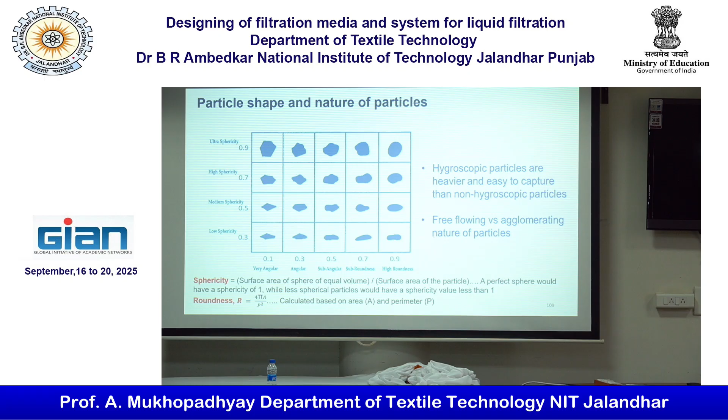Now, very briefly I am covering this, because in each and every case there is a lot of things to say. Particle size measurement technique: as I said, there is a problem with scanning electron microscopy. Similarly, the microscope is having problems. But one of the most prevalent techniques for measurement of very small size particles is dynamic light scattering. Dynamic light scattering is the option.

Otherwise, you can go for laser light diffraction. Among these, the most prevalent techniques are dynamic light scattering and the laser based technique. In the laser based technique, the starting range will be around 0.02. Whereas in dynamic light scattering, you can measure very small sizes. 3 nanoscale particles also can be measured.

But the issue is whether it is required, and for which application it is required, that has to be thought of. Because with dynamic light scattering, the cost will be three or four times that of laser based techniques. So why should we unnecessarily go for dynamic light scattering if it is not required? So this is all application based. Based on the application, we can choose which technique will be more appropriate, because as I told you, dynamic light scattering can go beyond 1 crore, whereas the light diffraction technique will hardly be 20 lakhs.

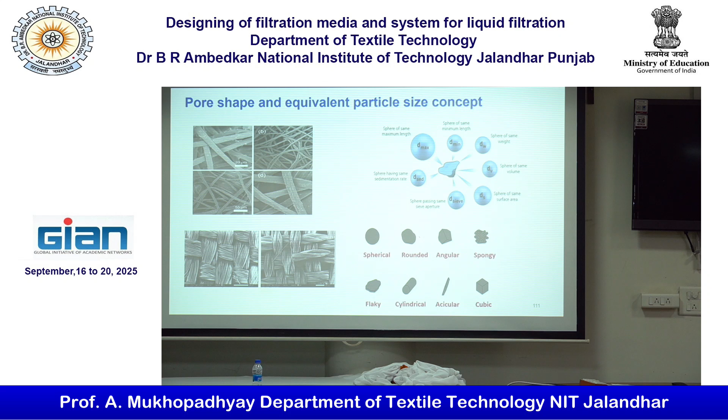Shape of the pores can be determined from the microscope. Yes, in that case, slice by slice cutting will be needed. Okay, that is okay. But the point here is that pore size is not uniform. Again, you cannot well define the pore size in the case of nonwoven. Particularly in the case of nonwoven, it is more problematic.

For example, if you project light from one side of a woven fabric, on the wall you can find the lights, because the light can pass through the pores. In the case of nonwoven, you will get diffused light. You cannot get dotted light passing through the pores. Nonwoven pores obviously will be different at different levels. But the point here is that it is not well defined.

People are using it to a certain extent in research, modeling and all these things. But the practical uses are very limited. Practical use means one must be able to design their material based on the particle size, and on how the pore size construction can be governed by different parameters. For example, in the needle punching technique, different parameters can govern the pore size and its distribution.

Now, factors affecting particle retention and filtration efficiency. Last class he also discussed it. Properties of the solid are important: particle size, particle shape, particle charge, which is also very important, and cake characteristics. Here I have not included everything, because particle charge also has influence, whether the particles are of agglomerating type or not can influence the separation. Properties of the fluid: density, viscosity, chemical nature, temperature and pH.

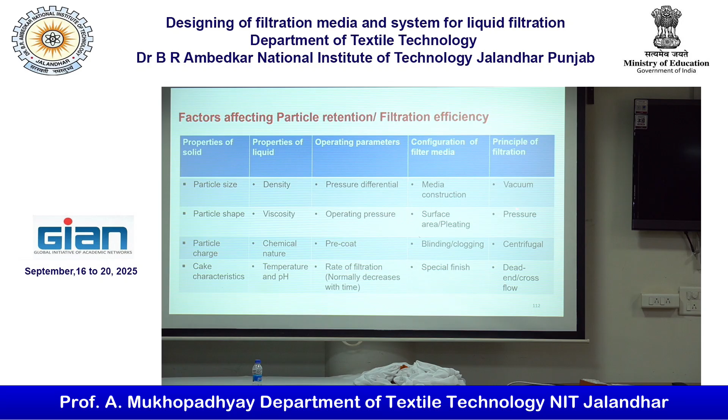Operating parameters: pressure differential, operating pressure, pre-coat; the rate of filtration normally decreases with time. But you should not connect these horizontally, because these are independent parameters under each heading. Don't try to connect them horizontally. Configuration of the media: media construction, surface area, blinding, clogging, special finish. Principle of filtration: vacuum, pressure, centrifugal, dead end filtration.

That is how the different factors can influence. Now this is one of the important slides. We have still discussed about the different types of mechanism.

In fact, liquid filtration is more versatile. Very complex machines are available, unlike air filtration applications. In air filtration you have HVAC filters, industrial filters, face masks - so limited. Automotive filters also have limited construction. But in liquid filtration application, there is a huge, endless range of applications, and you can find different kinds of filters being used with different philosophies.

Now consider the tendency of clogging of filter media, because that is very important. Filtration using gas pressure will have less clogging compared to other methods. Filtration using centrifugal force - more clogging means less life, as I have shown you through the video. Filtration using a mechanical pressurizing system, that also I have shown you - under mechanical pressurization also you can go for filtration. And with vacuum filtration, the tendency of clogging will be more, particularly during the washing.

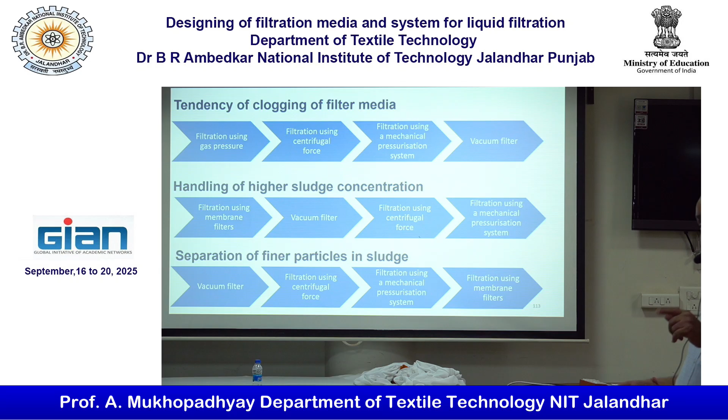If you see the whole cycle, washing is done at the top of the drum. Now why is washing done? It is not done in all cases, particularly for mineral recovery, you go for washing so that the mineral will be free from all sorts of contaminants.

So if you are going for water to clean the cake, whenever your vacuum is active, it can also take the water along with the particulate matter. So the tendency of blinding will be more in the case of vacuum filters. This is important while you are choosing the particular kind of system.

Handling higher sludge concentration - filtration using membrane filter requires very low sludge concentration, only then can we go for membrane filter. If it is more, then vacuum filter. If it is further more, we can go for centrifugal force. And if it is very high, we will have to go for a mechanical pressurization system - that I have also discussed.

So you will have to see the sludge content, concentration of particulate matter in the sludge, and separation of fine particles in the sludge. For fine particles, vacuum filter is not so effective - filtration using centrifugal force will be better, and mechanical pressurization will be better than centrifugal force. Using membrane, like RO, you can separate out particles as small as 0.0001 size. So it matters a lot.

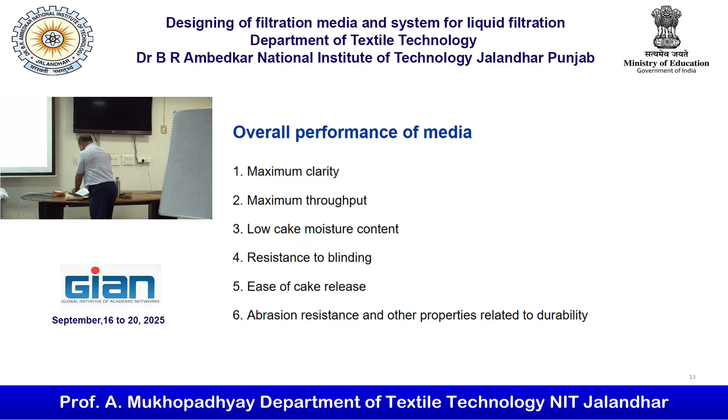Ease of cake release will be better. If you see, last class also I have shown you, this side is the cake side. It is made in such a way that this side is predominantly monofilament or multifilament, and this side is spun yarn. Like the denim cloth, if you see, it is made by two threads, but the blue color is on the surface. This is possible because of the weave structure. You can make the weave structure such that you get the filament majorly on this side, and on the back side it is spun yarn. Spun yarn is good for filtration, but the filament yarn is good for cake disposal.

But if you are using the spun yarn side as the cake side, what will happen? The cake will try to anchor over the surface. Disposal will be difficult, not particularly due to clogging, but there are projected fibers from the spun yarn that will try to anchor the cake, so disposal of the cake will be a problem. This side is more smooth. That's why in normal cases also people go for singeing, singeing at one side. Why singeing? Because the protruded fiber must be removed. If you remove the protruded fiber, obviously the disposal will be better. So cake disposal is also very important.

Abrasion resistance and other factors related to durability. Abrasion resistance is very vital, because the viscosity of the liquid is higher, abrasion will be very high. In drum filters, if you see their mechanism, it is continuously abraded. Although people have tried to change the geometry so abrasion can be limited, there is still a lot of abrasion in the process.

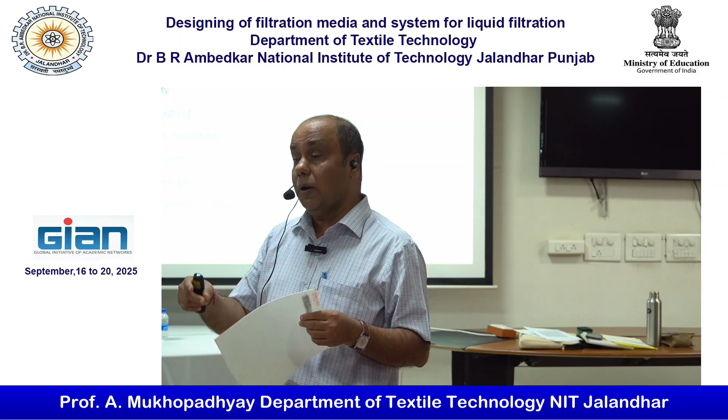There is also the possibility of flex fatigue, because the material will be deformed repeatedly. Under repeated deformation, the problem will be more in the case of non-woven fabric as compared to woven fabric, because woven fabric, whatever way you make it, is more stable, but non-woven has some unique properties. That's why in an application, if you are using non-woven, it will be cheaper than woven fabric and perform better, but its life will be less. So both ways you will have to consider the matter.

I had a query regarding it: among the three, which is more suitable, whether plain or satin, for acrylic? Among the three basic weaves, which type of fabric is more suitable? That I will discuss, okay.

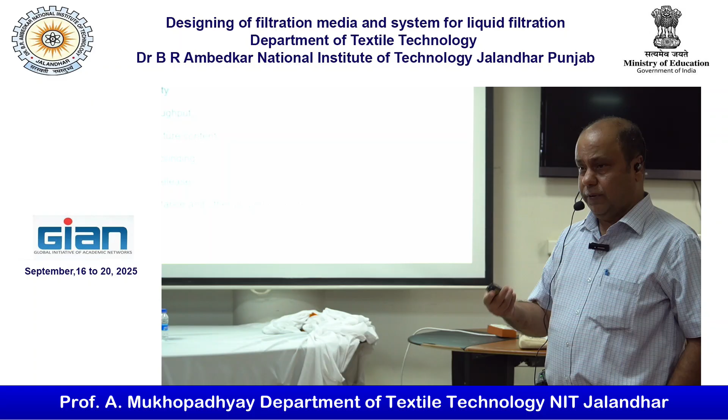So suppose if you are going for satin weave, that is better. That is already there in the next lecture. I will show you the different configurations of cake and fabric configuration, that will be discussed. So this is all, because this was the remaining slide I could not cover in my last class. Now I am discussing about the...

I think, should we have a break? Then we'll start, or what?